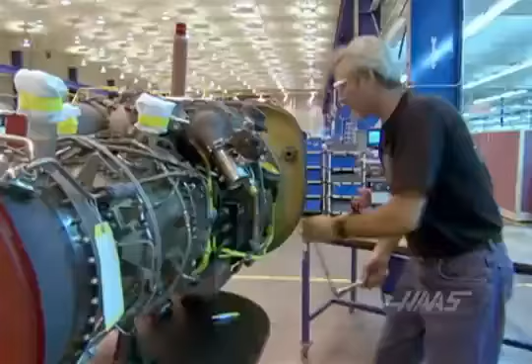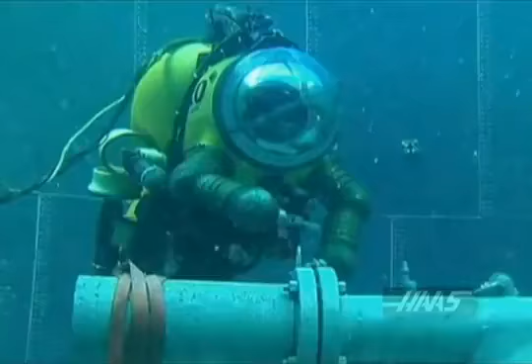The high-technology capabilities that Haas machine tools bring to the world of manufacturing have positive effects on a global scale. Affordable automation fuels economic expansion and raises standards of living around the world. Haas technology plays some role in almost every aspect of modern life on planet Earth. Wherever you look, the ability to cut and shape metal is key to advancing technology, industry, and commerce.

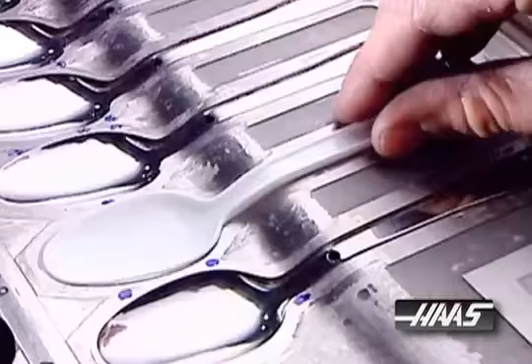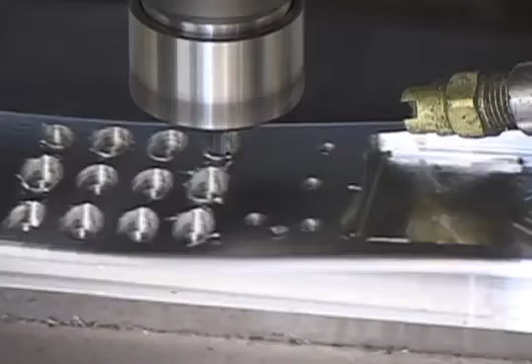At Haas Automation, clever ideas are an everyday reality. Imagining new ways for customers to make parts, refining those ideas, researching their viability, and developing, designing, and building them into production equipment is what Haas does.

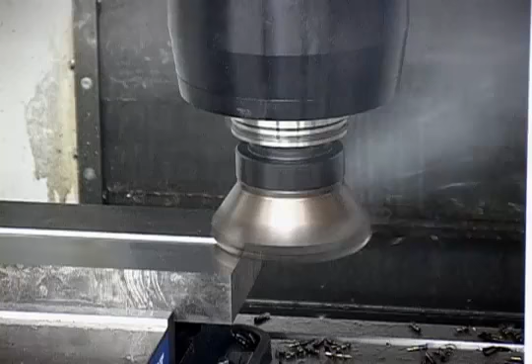Sure, Haas is everywhere, but what's really interesting is how they are now among the largest, best-selling, and most dominant CNC machine tool companies in the world. Part of this success comes from always exceeding customer expectations.

To find out more, let's take a close look inside the workings of Haas Automation to see firsthand what makes a Haas, well, a Haas.

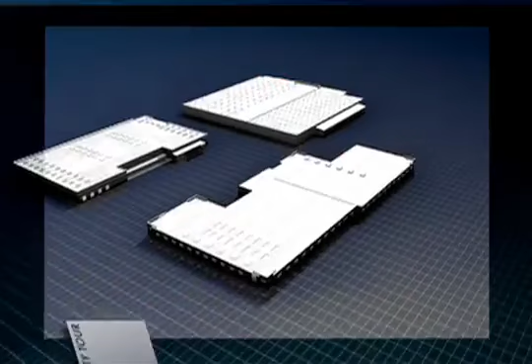Located in Southern California, Haas Automation's custom-built 1 million square foot facility serves as the central hub of our design and manufacturing processes.

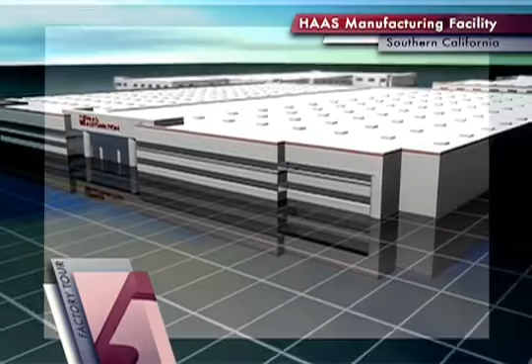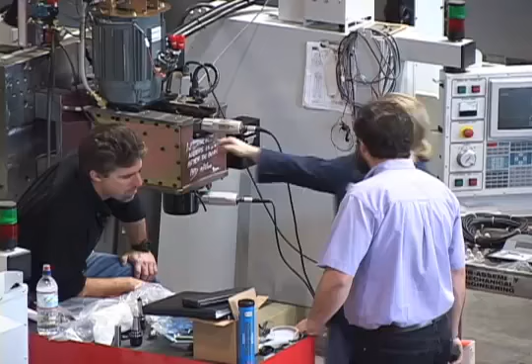It all starts in the engineering department. More than 200 engineers design, refine, and constantly re-engineer Haas machines. Both mechanical and electrical engineers play a hands-on role in the entire process. This close relationship between the designers and the builders ensures a streamlined manufacturing procedure for every machine.

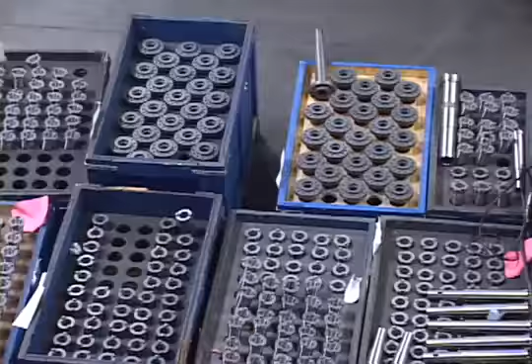While Haas machines are conceived as ideas and CAD drawings, they are born of hundreds of individual parts, most of which are manufactured in-house on state-of-the-art CNC FMS equipment.

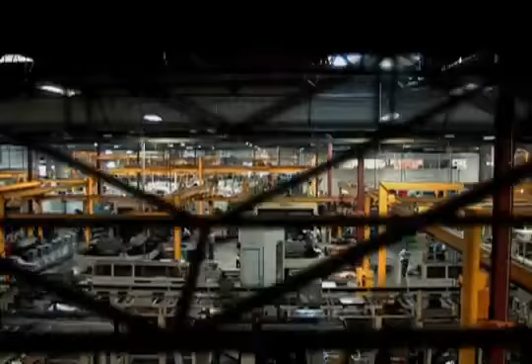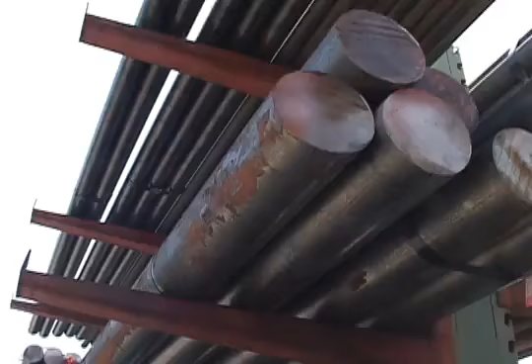At the heart of the facility, you'll find the manufacturing center of Haas Automation, the machine shop. There are more than 270 CNC chip-making machines in operation here, consuming upwards of 136 million pounds of raw material per year.

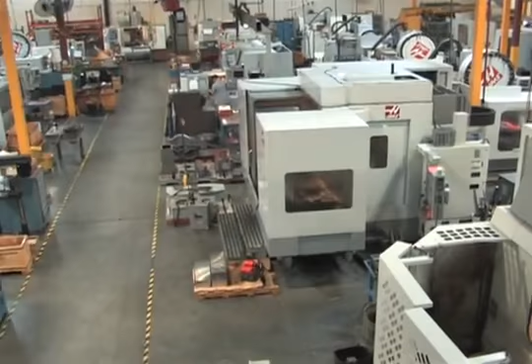How do we maintain the Haas level of quality in such a high-output production environment? We put nearly 200 Haas machines to work for us, right in our own machine shop. This allows us to observe firsthand the day-to-day operation of our machine tools.

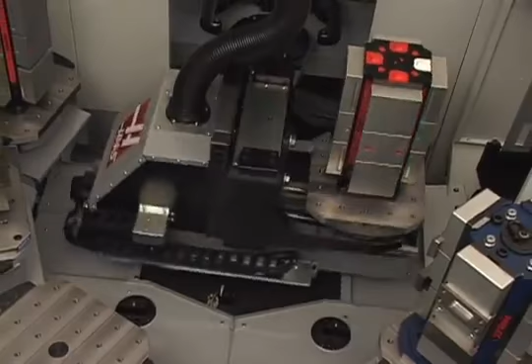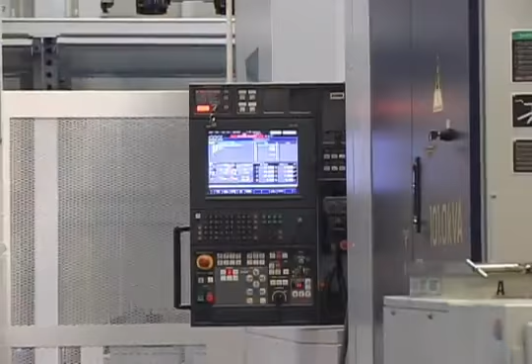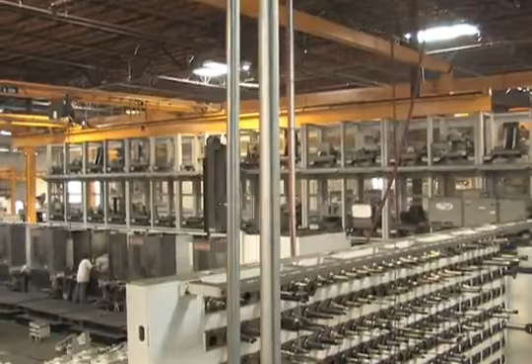Many of which employ some of the most advanced manufacturing technologies in use today, such as robotic machining cells that run unattended. We also employ flexible manufacturing systems that range from a single machine with 6 pallets to our largest custom-configured system with 5 machines, 143 pallets, and 1,650 tools.

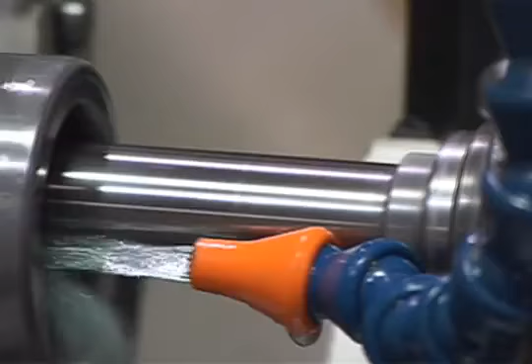Producing more than 2 million parts per year, it's obvious that the machine shop is one of the keys to Haas Automation's success.

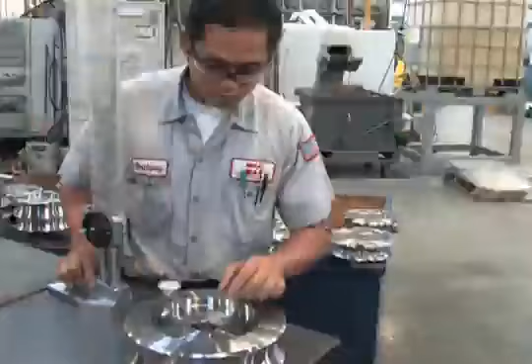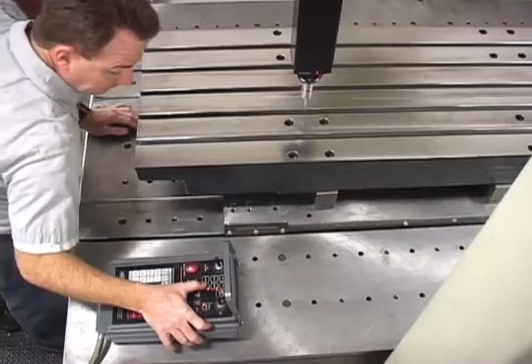But from the Haas perspective, this is not enough. In order to maintain the highest level of quality, parts are thoroughly inspected throughout the manufacturing process. Critical components are inspected in a temperature-controlled environment to ensure all measurements are accurate and consistent. Nothing is left to chance. This level of quality assurance is the only way Haas can ensure that every machine is a top performer.

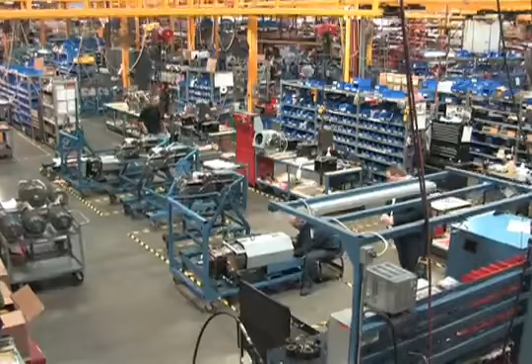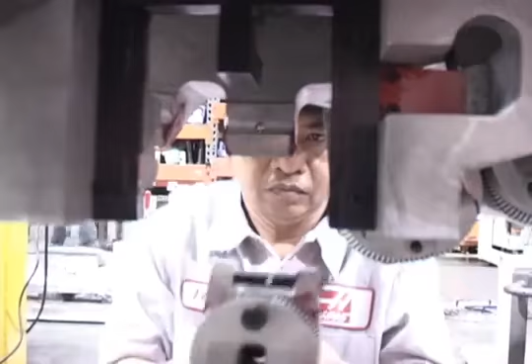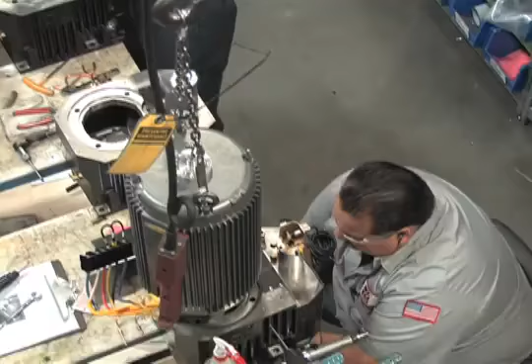Finished and inspected parts move to the sub-assembly areas of the Haas facility, where they are built into major machine systems. Haas frame structures, motion components, spindles, tool changers, drive systems, and the complete CNC control are all built by specialized teams of Haas technicians. Teams work together to streamline the process and refine the final assembly.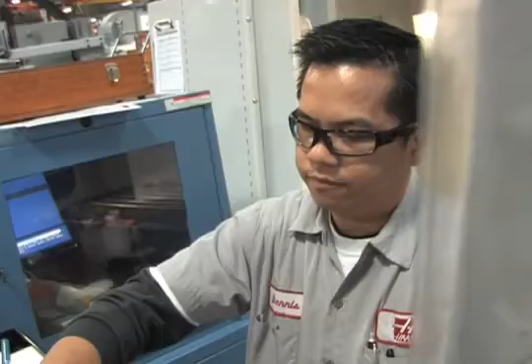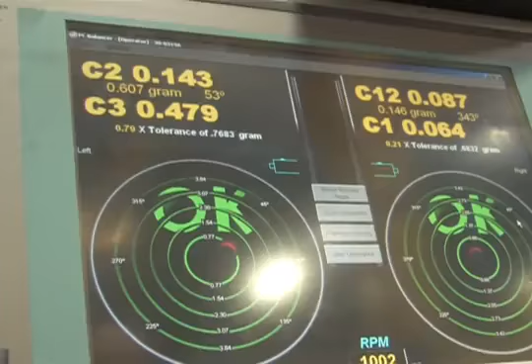Each step is performed by a highly trained team specialist. Every process in the Haas facility is documented and performed according to ISO 9001 standards. All work is double-checked before the units can move to the next step. Each subassembly is thoroughly tested and inspected before being sent to its ultimate destination on a Haas machining center.

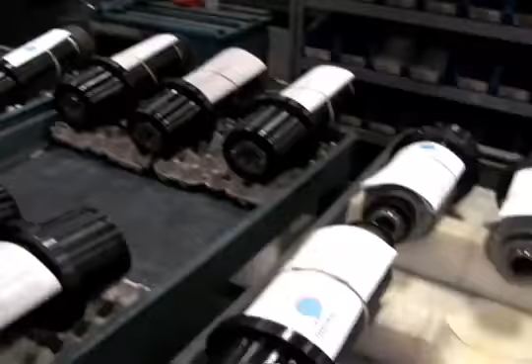Team members take great pride in a job well done. They document assembly and testing and send this information with each unit.

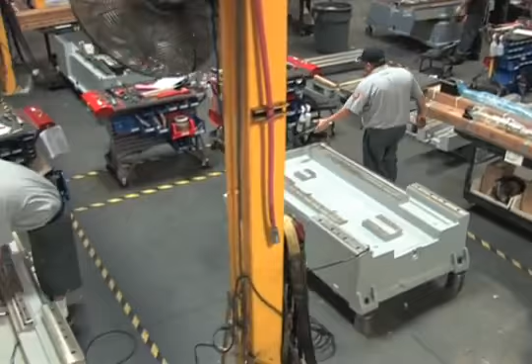Out on the assembly floor, technicians build the base structure of Haas machining centers. Cast iron frame structures and motion components come together, forming a heavy-duty foundation for a vertical machining center.

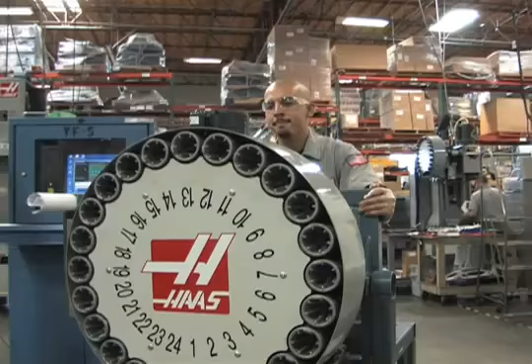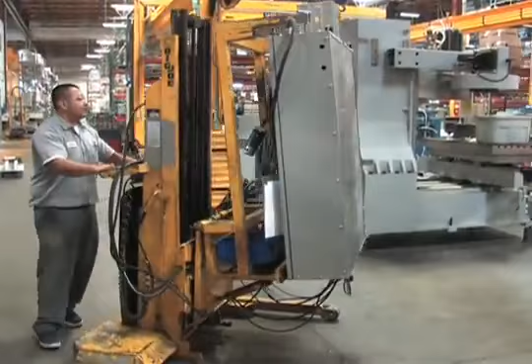When each Haas machine moves to the final assembly area, the required sub-assemblies arrive and become part of the machine. Here's an example: the brains of the machine, the highly refined Haas control, is ready for installation. Once the control is in position, team members begin the process of attaching all connections and double-checking their work.

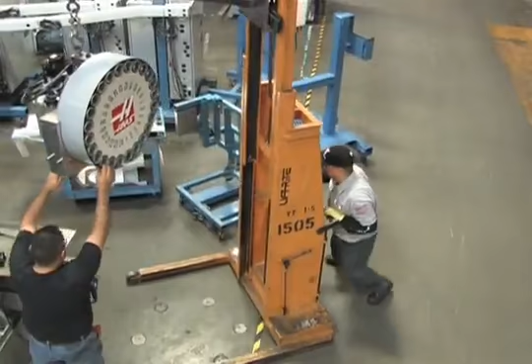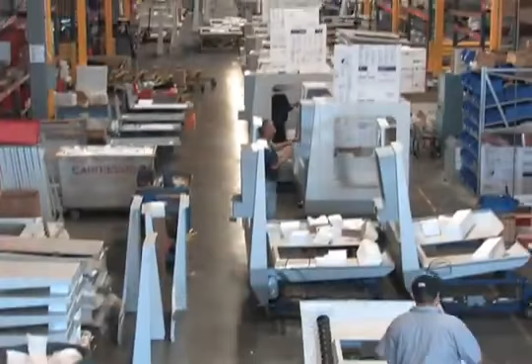Now, a pre-assembled side-mount tool changer is mounted to a vertical machining center. In another sub-assembly area, the sheet metal enclosure for this machine is being built on a special assembly line.

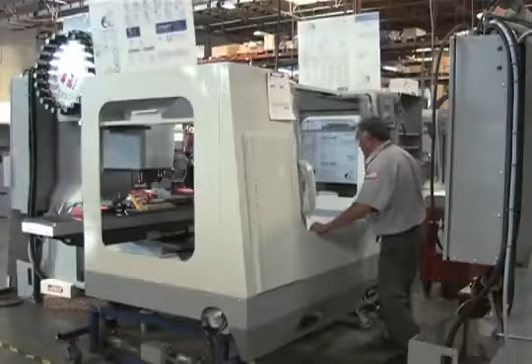Delivered just when it's needed, the enclosure is secured to the machine quickly and efficiently. This process, developed by our manufacturing engineers, saves more than 6 hours of assembly time.

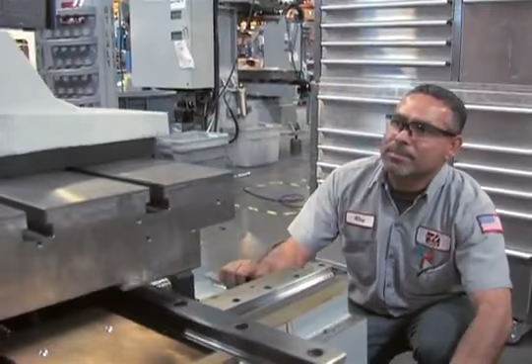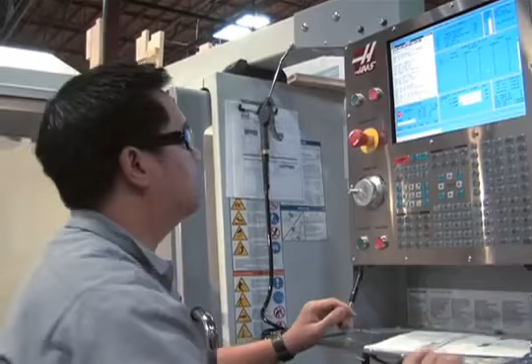All through this process, team members perform visual, mechanical, and instrument-controlled inspections of each step. Nothing is left to chance. Next, a battery of tests and inspections are performed to confirm that the machine is absolutely true and square, and that all systems operate as designed.

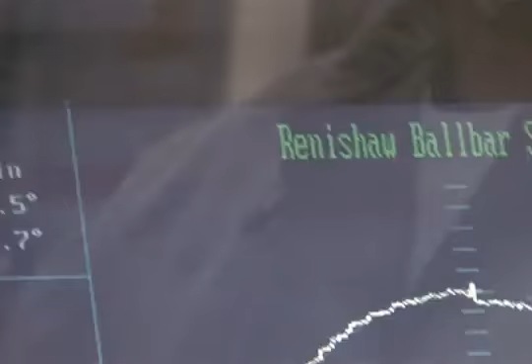The systems and efficiencies you've seen here are applied throughout the Haas operation. That's how Haas can build high-quality machine tools that you can buy at affordable prices.

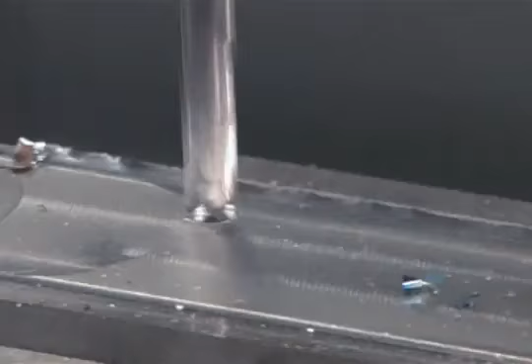There's still one thing the inspector must see: an actual test cut. No machine leaves the Haas factory until it has proven its ability to perform. Now it's a Haas.

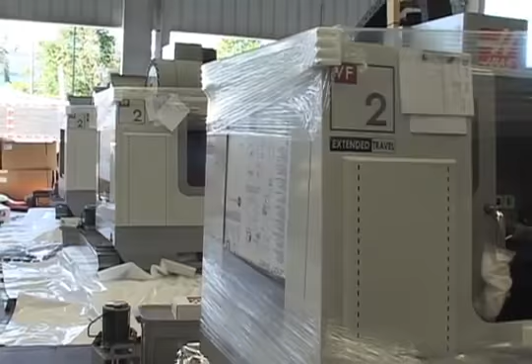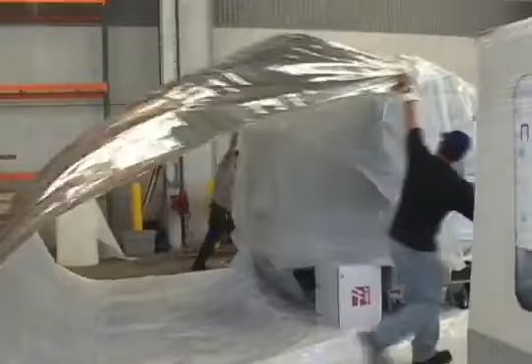Members of the shipping team now prepare each machine for its journey to the customer, where it will become a crucial part of that shop's profit-making strategy. Here too, there are checklists and protocols to follow. Even in the final stages before leaving the Haas factory, each machine is treated with extreme care, and all processes are controlled and measured.

This is how Haas exceeds customers' expectations. We use the best practices to stay on the road to constant improvement. We build it the Haas way.